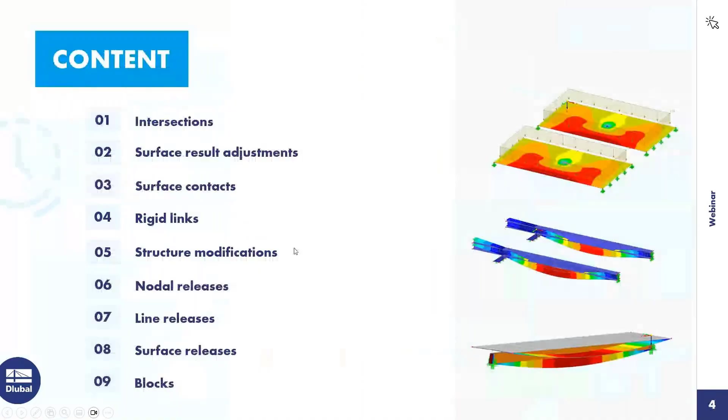Okay, to the agenda today. Those are the 9 features that I would like to introduce you. Very valuable features, but you will use some of them not so often, others more often. In my opinion, for example, you won't use the intersection so often, but the surface result adjustment is a feature that you will use more often. Those are the other features, and I prepared a model for every feature, and I will explain the function of these features in the program.

Let's start in Rfem with the first model and the first feature. You can find all features under Insert, Special Objects, where there are not only 9 features, because there are 2 new features, the design strips. That's a feature often used in the American market, and we also prepared a webinar about it. Maybe my colleague can share the link in the chat to that webinar about the design strips.

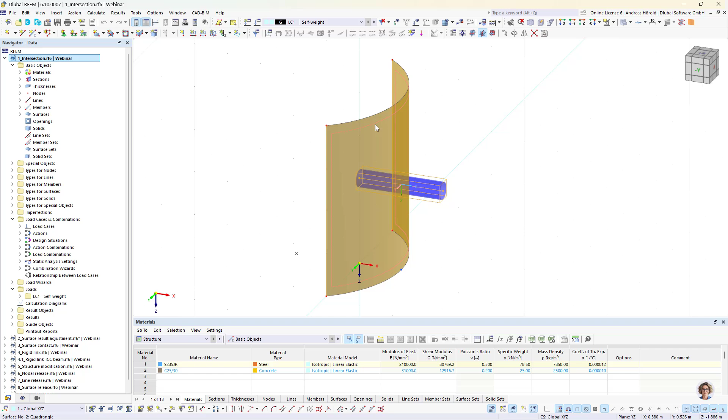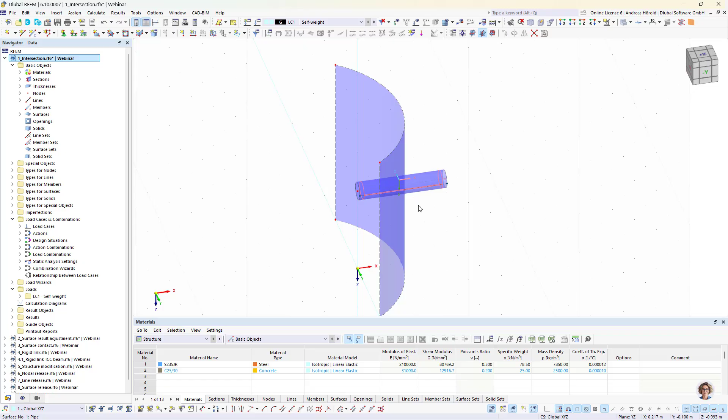Okay, let's start with the intersection. The best way is to select all the surfaces and then create the intersection. But as you can see, that's not a surface, it's a member at the moment. With a right click, I can go to member and then generate surfaces from member. And now all objects are surfaces. We would like to create an intersection, and at the end, this part of the tube should remain and not this one, and we would like to have a hole in that surface.

Okay, so let's select all, then with a right click move to surfaces, and we can create the intersection. Maybe first, the definition of the intersection: if surfaces intersect and internal forces are transferred at the contact points, it's necessary to create an intersection. This prevents the creation of independent and unconnected subsystems. So this function, create intersection, only creates the intersection line. I can show that, you can see only this line is created.

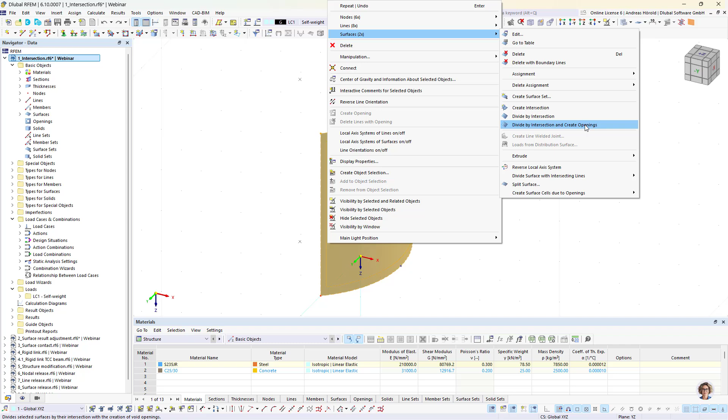I undo all, then open the dialog again. Then divide by intersection: the intersection will be created and subsurfaces will be created. And with this function, additionally, the intersection surface is deleted. So we will use that function, and you can see there's also a hole.

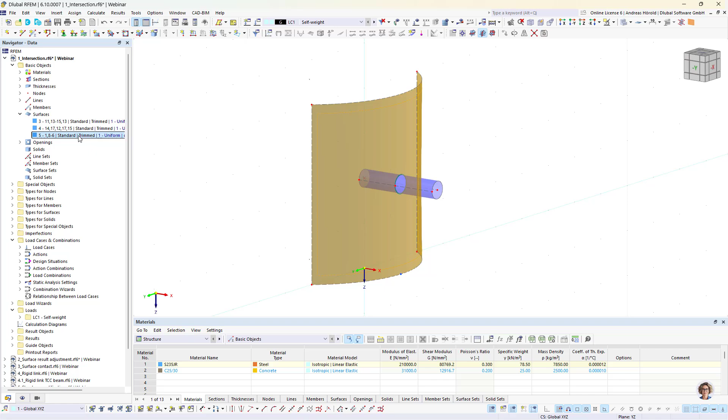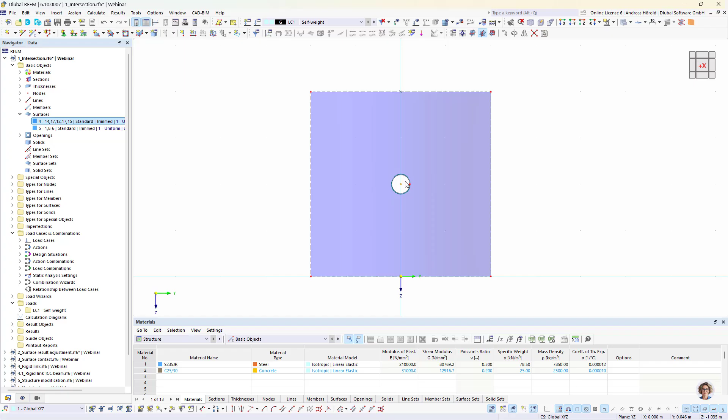So, we can easily delete this part of the tube. But if you have more complex models, I recommend going to the navigator data. Then you see all the surfaces, and you can select the single surfaces to see what you need to delete. For example, with a right click, I can delete with boundary lines. So I can also delete this line, which was the middle line of the member. And now we have a correct model.

Okay, that should be all for that feature. We turn to the next model and the next feature.

So I would like to explain the surface result adjustment. You will also find it under Insert, Special Objects. But first I would like to say some words about the surface results adjustment. It describes an area in the model whose graphical results are not represented by the actual diagrams, but as mean values. You can use a user-defined adjustment area to evaluate the smoothed surface internal forces. In Rfem 5, this was called the average region, and now the name is surface result adjustments.

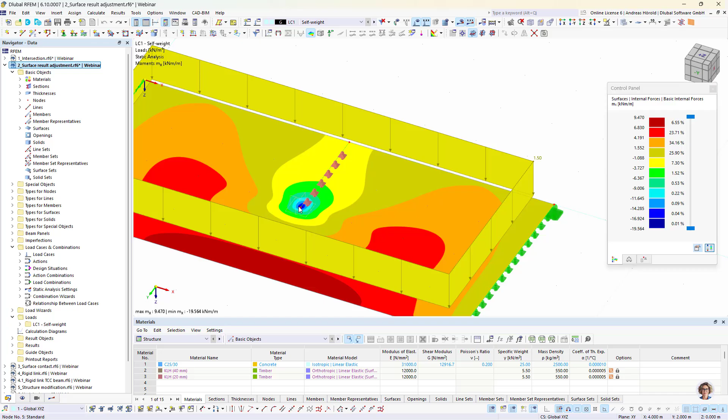We have that surface here. That's the CLT slab over a wall. And you can see there are quite high internal forces only on that point.

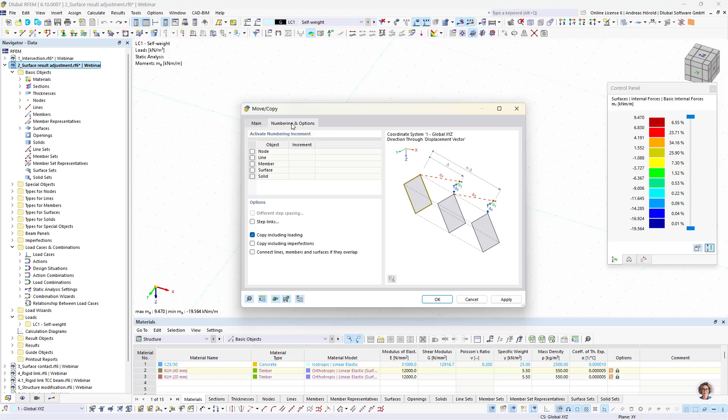And we would like to smooth that internal forces. To compare the results, I would like to copy that model. So create a copy, 6 meters, and copy including loading.

So I create the surface result adjustment only on that point, and we will compare it with the other point. Then in the menu, insert, special objects, surface result adjustments.

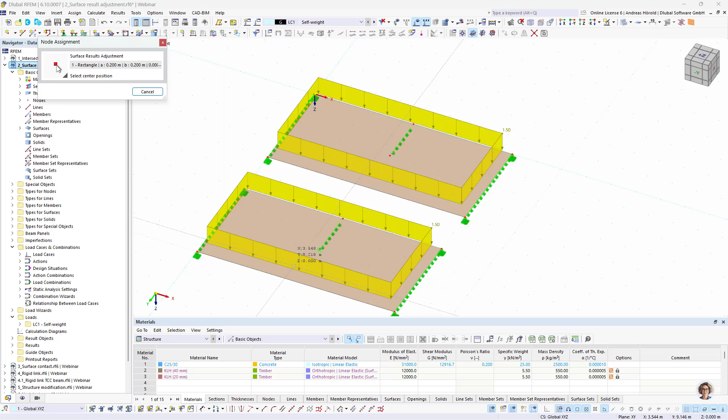Here we have different options for the shape: rectangle, circle, ellipse, and so on. The dimensions should be 20 centimeters by 20 centimeters. Then I select the endpoint of the wall and move it 10 centimeters in minus y direction. And I also have to select the surface, that surface.

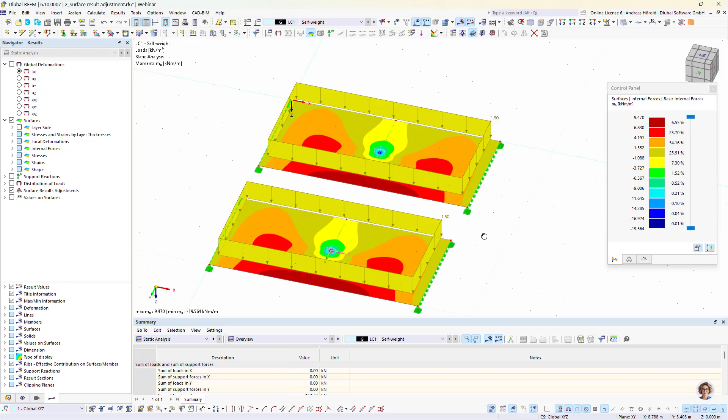So then we can calculate all. Okay, and you see that's the highest value, but that's the value what we have in the original model, 19.5. So let's check what the value is, or the highest value, for that surface.

I deselect the original model. Yeah, and you can see now is the highest minus value, the lowest value, 16.0.

Let's turn back to the surface result adjustments. I go back to special objects. You can see it here. Maybe some explanations or additional explanations of the different adjustment types.

This averaging of these values, that's the default setting for basic internal forces in surface direction y, and this is the average, well, the default setting for basic internal forces in surface direction x.

Then contact stress area. This option is currently only relevant for the steel joints add-on. Then user defined: the results of selected types of internal forces are averaged. In that case, mx, but you can select more if you want. That's not a problem.

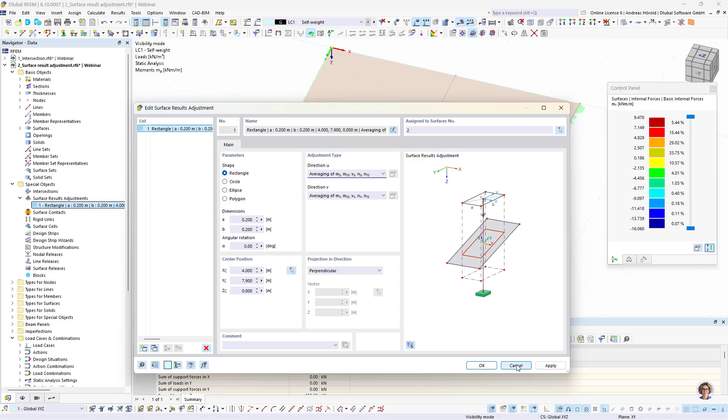When you want to average only one direction. Okay, so that was an additional explanation. Okay, that should be all for that model. Turn to the next model.

And the next feature that I want to explain is the surface contact. A surface contact describes the connection between parallel surfaces. It is a coupling of surfaces by which you can control the transfer of forces without creating a contact solid, as was the case in RFEM 5.

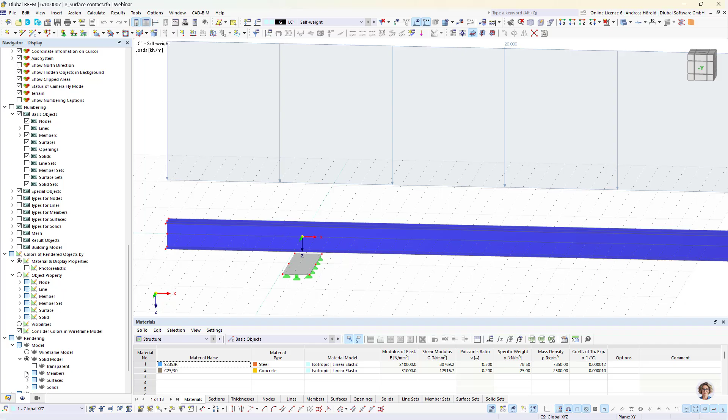And this allows you to connect surfaces whose contact is, for example, only effective for compressive forces. And that's what we would like to model here. That's a member created by surfaces, and that's a concrete surface. Let's display it in the navigator display with the real thickness.

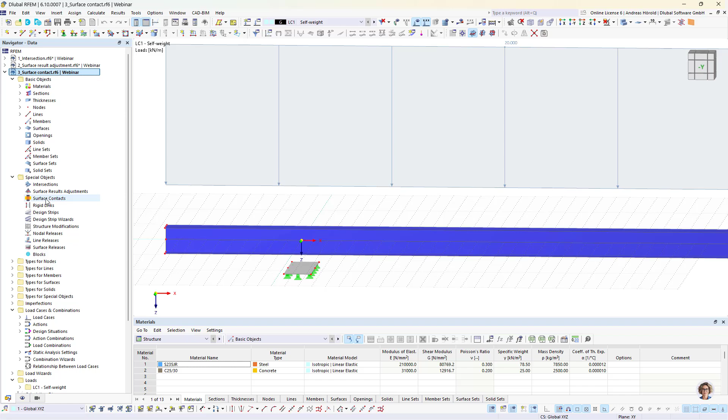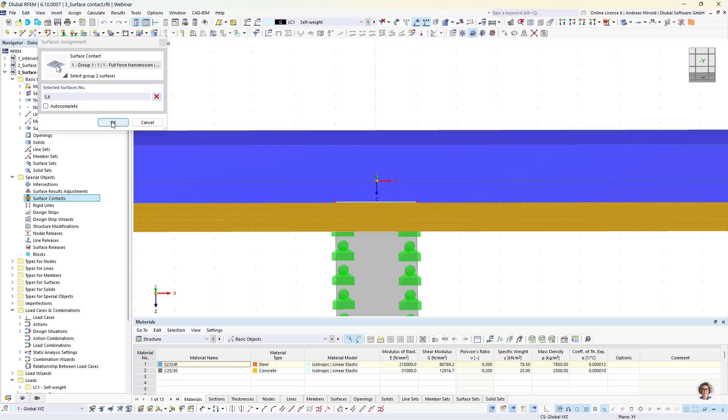So surface filled including thickness. That looks good. But in reality, in our model, it's not connected yet. So we would like to create the surface contact. This time in the navigator data, that's another option, special objects. Then right click on surface contacts, new surface contact. At first this surface, okay, and then the flanges, the two flanges of the member here.

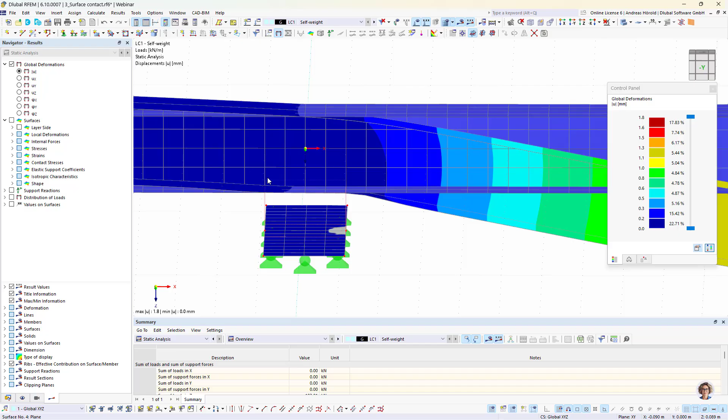So let's calculate all. The contact is there, but you can see it's rigid connected on all sides, on both sides of the concrete slab. But we would like to define it that it can lift up on this side, that the member lies loosely of the concrete block.

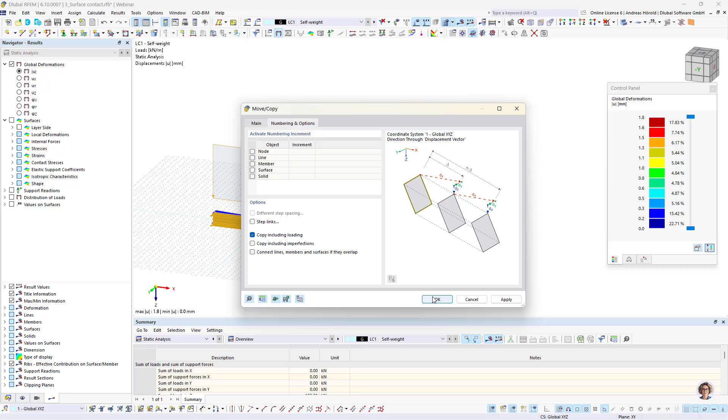To compare it better, I copy all in y direction, 2 meters, create a copy and including loading, okay. So, and I modify this surface contact.

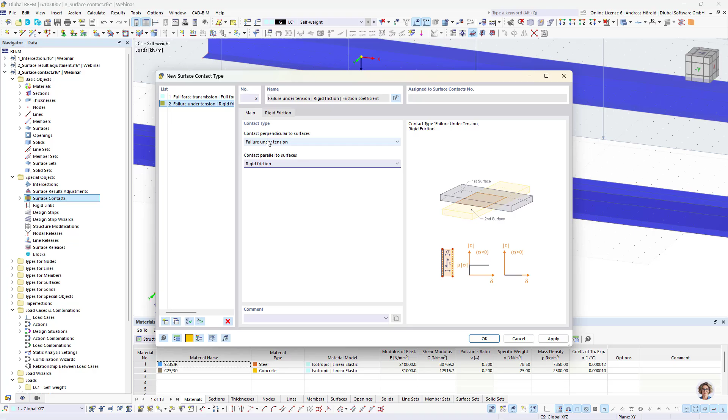Not a full force transmission, but a new surface contact type: failure under tension, that can be lifted up. And in that case, rigid friction, I define only a very small friction coefficient. But that's very important here. Okay, then we calculate all.

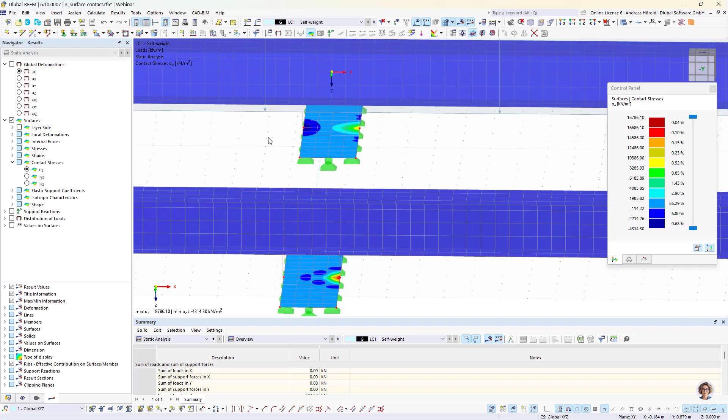Now you can see the difference. It can lift up here on this side. I can also show that on the contact stresses. In the original model there is compression here and tension on this side, but in this model there's only compression on the right side and no tension on this side.

Okay, that's all to that feature. We turn to the next model and the next feature.

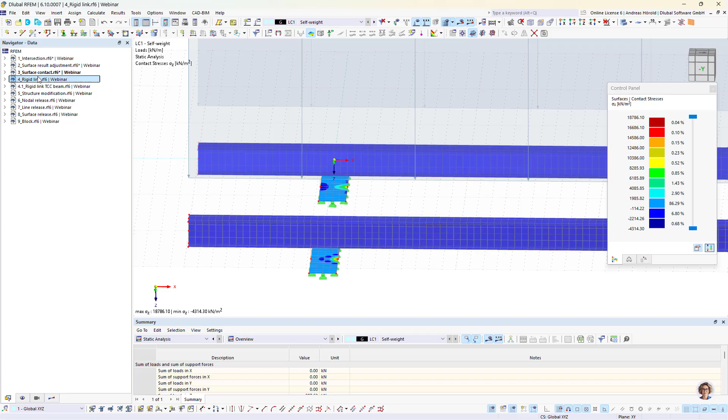Rigid links is the next feature. By using rigid links, you can model connections between lines, members, and surfaces without defining coupling members or rigid surfaces between the objects. Deformations of coupled nodes, lines, and members are identical for a rigid link.

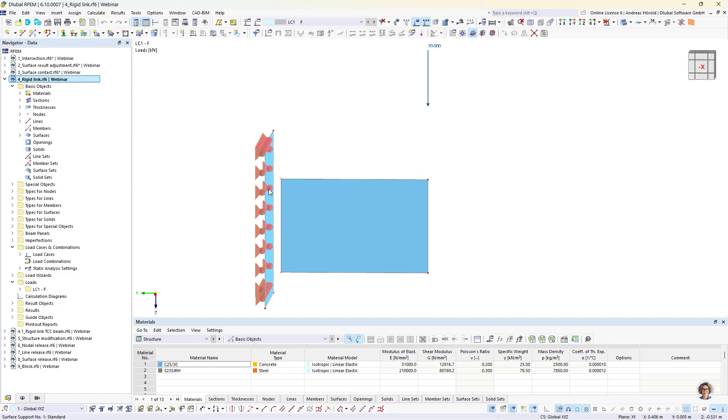In that model, I could also define a rigid surface, but with this feature, it's quite easier. The real advantage of this feature is the objects can be placed on their actual location.

When I turn to the navigator display and select filled including thickness, you can see all is on that place where it really is. So, and now I create the rigid links.

Insert, special objects, rigid links. In our case, line to surface. That's the line and that's the surface, and you can see the line and the surface is automatically created.

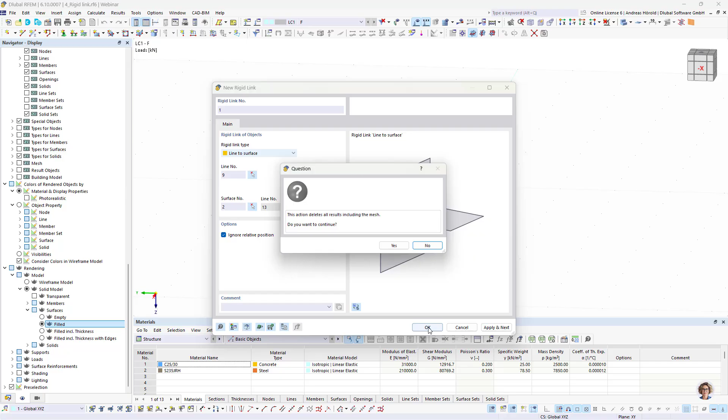So now we can calculate all. Okay, that looks quite good.

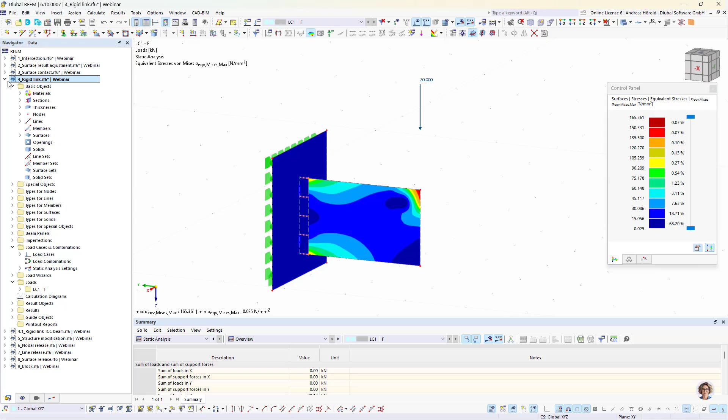I would like to show that on a more practical example. That's a timber concrete composite beam. You can see that's a concrete surface on its actual position, and that's the timber member.

And we can also go to the navigator display and select filled including thickness. But we need to create the connection.

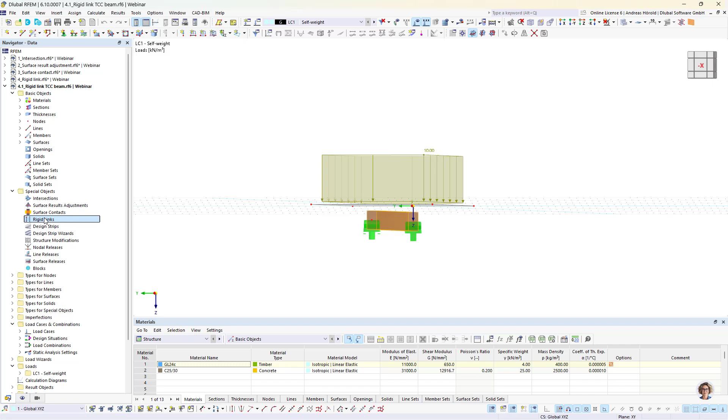So, special objects, rigid links, right-click, new rigid link, line to surface again: the middle line of the timber member and the surface. Okay, and this line is created automatically.

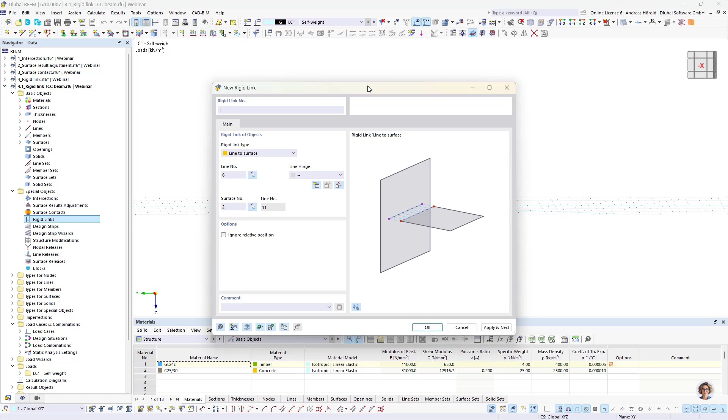And we have to deselect the option 'ignore relative position,' because we would like to consider that the member is below the surface. Okay, so let's calculate all.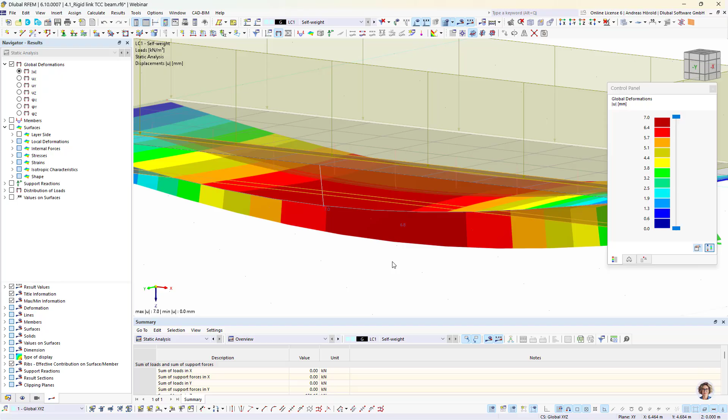At the moment, we have a rigid connection between the surface and the member. And that's not really correct, because there are joints for this connection, and we are not rigid. That's why we need to select a line hinge. So how to do that?

We take a look at the result. I think you can't really see it. Okay, 6.8 is the deformation in that point.

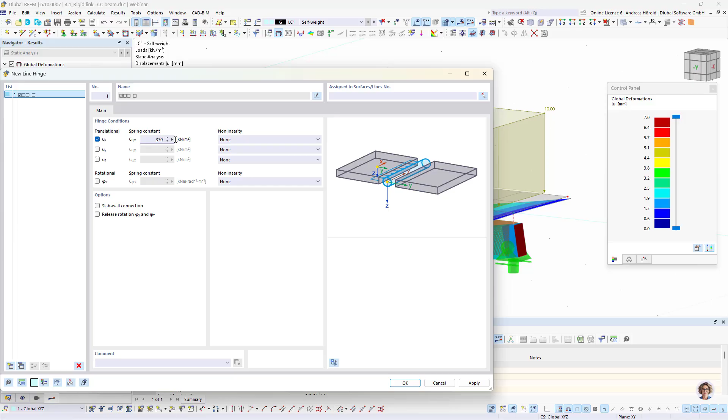Then we do a double click on the rigid link, and we create a line hinge now for the connection of the two parts of the member and the surface. And we create a spring, or define a spring constant for the longitudinal direction of the member. So, 370,000 - it can be nails or something like that.

Okay, we had 6.8 for the deformation, and now it should increase. Now, where are we? 7.8. It was increased.

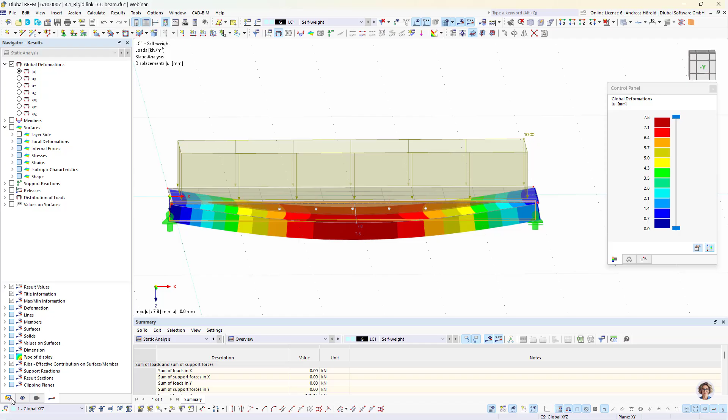Okay, then we turn to the next model and the next feature. The next feature is the structure modification.

I would like to display it on that model. I use the model that you can find in the Dlubal Center. Just a moment, I have to move it to the right screen. So, okay, you can find it under examples, projects, examples, and that's the model.

Okay, and I turn to the base data. I selected the add-on structure stability, and I did a stability analysis. But first, some words on the definition of the structure modification.

It allows you to individually adjust stiffness of materials, objects, and object types. Furthermore, selected objects or nonlinear object properties can be deactivated for the calculation. Structure modification must be assigned to load cases or load combinations. We will do that later.

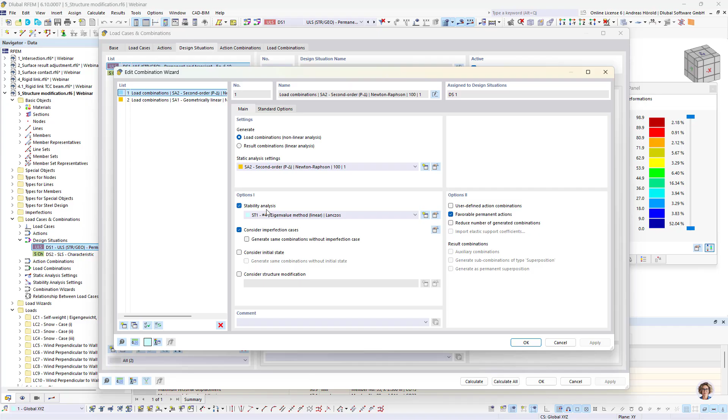I show you the design situation where I selected the structure stability. So I turn to the combination wizard, and I selected the stability analysis. So, under static analysis and design situation number 1, I can find the minimum critical load factor. That's 3.6 and combination number 13.

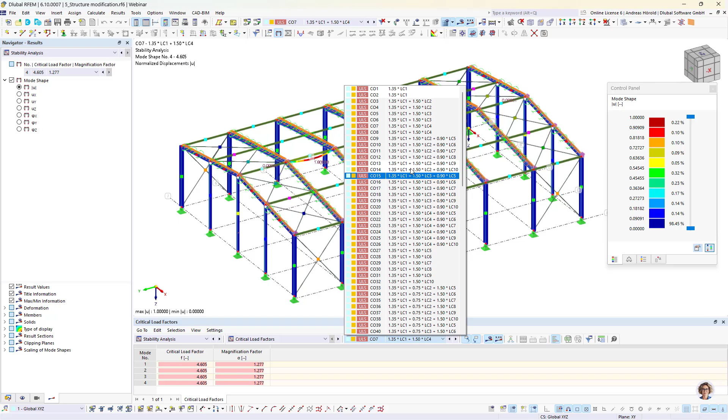So let's turn to the stability analysis and combination number 13. And you can see the critical load factors or the mode shapes are not global mode shapes, but local - for this member and this member and so on.

And I would like to see a global mode shape. I could select or calculate more critical load factors, maybe 40, and search for the first global mode shape, or I use that trick.

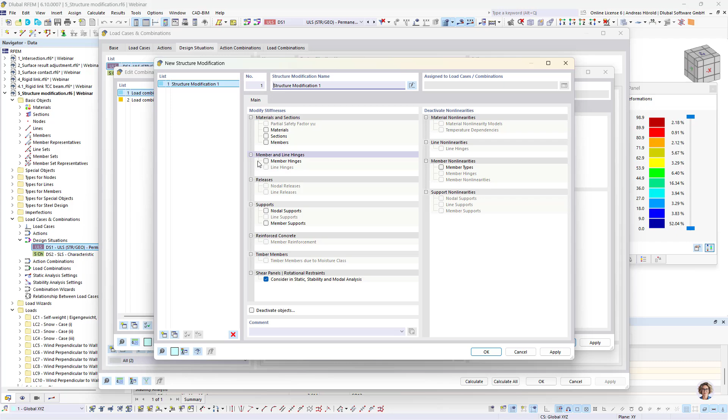So I turn back to the design situation, number 1, then to the combination wizard. And I consider structure modification, and I create a new structure modification. That's what I said at the beginning - you can modify the stiffness of material, section, members, and so on, member hinges.

Let's do that as an example for the sections. So, I increase the moment of inertia factor of the coupling members and these members in the first row. So a factor of 10 here, for IY and IZ.

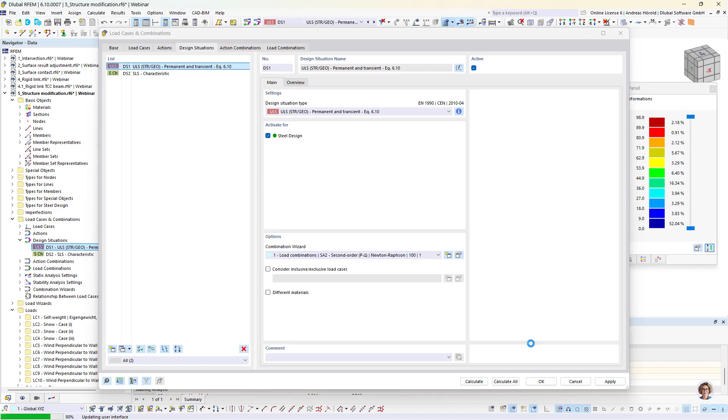Okay, those are the members. This member and these coupling members.

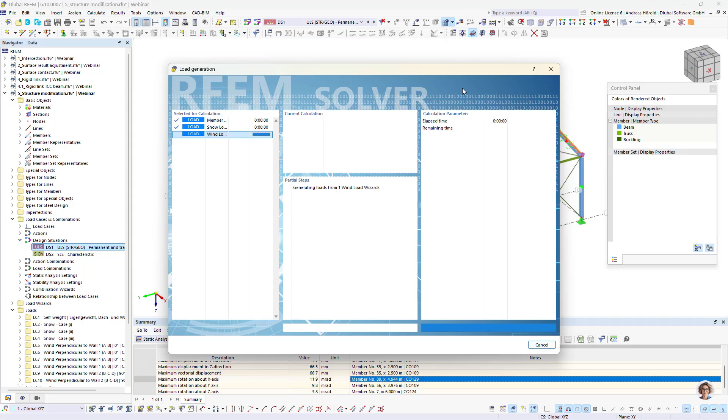So then let's calculate that, or we can do the static analysis. That's okay. That should take some time.

We have 100 combinations. First the static analysis will be done, and then the stability analysis, ST. You can see I have more than one core, so it's a parallel calculation. But we need to wait some seconds.

The result will be, because we increase the stiffness of the coupling members and so on, that we get a global mode shape for the first mode shapes.

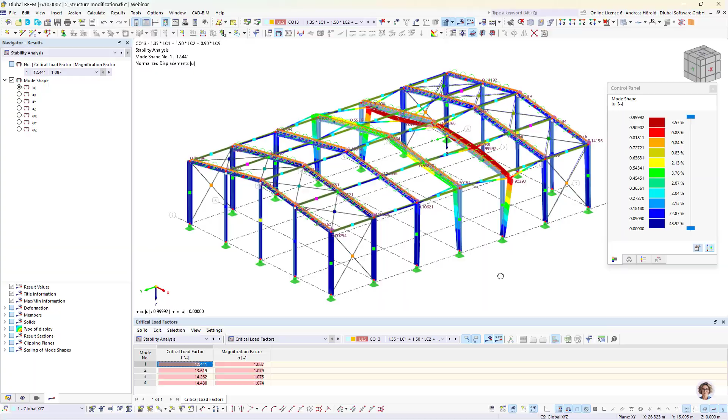So let's take a look at the stability analysis. Combination number 13. Okay, and you can see the first mode shape is a global mode shape. Also the second and the third and so on.

Just use that function only for such things, and you must not increase the stiffness of single members, only for such calculations here. It's a trick.

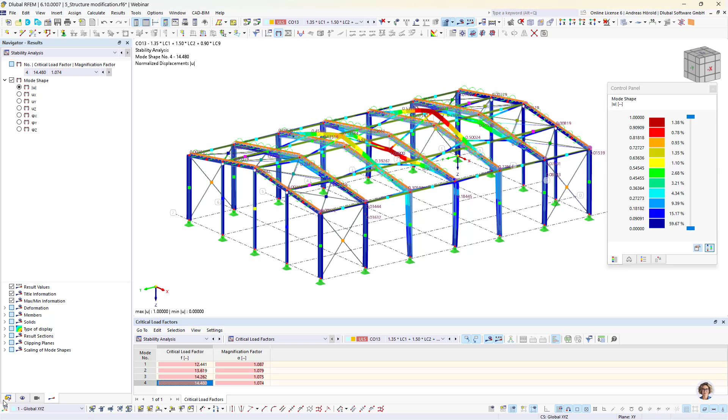Okay, then we turn to the next model. And I would like to explain the nodal release.

With a nodal release, the model can be decoupled at a specific location. You can use it to model, for example, a beam lying loosely on top of each other. I created this simple model, and I would like to model that this member lies loosely on top of this.

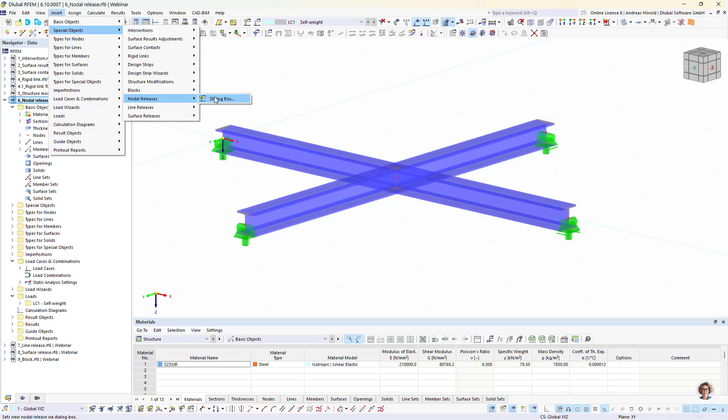So, insert, special objects, nodal releases. Then node number 5, okay. Then I will release, or would like to release, these two members.

So then nodal release type. I create a new one. So, and for the Z direction, non-linearity fixed if positive, reset.

Okay, then I have to define a local axis system of this member. Okay, that should be all.

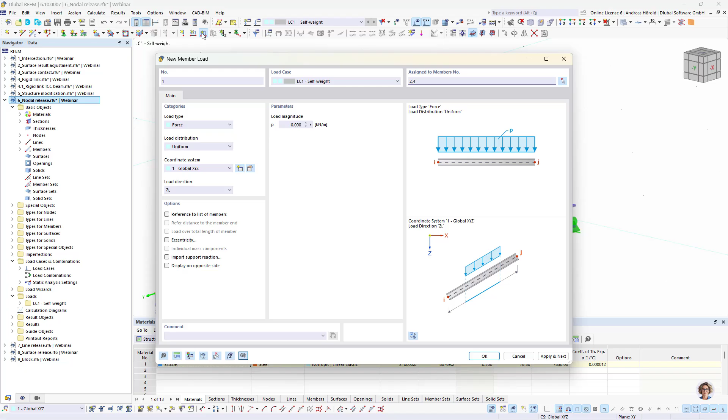So then I create a load in minus Z direction, minus 30. Okay.

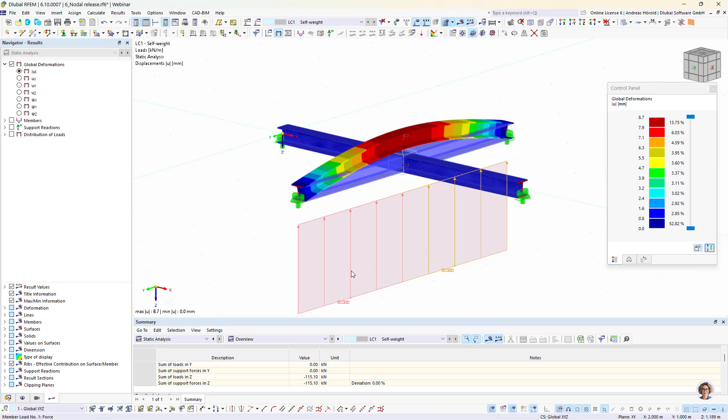So, and now it should lift it up. Okay, that works. We can change the direction. Okay, and now the deformation in the middle point should be the same. Okay, good.

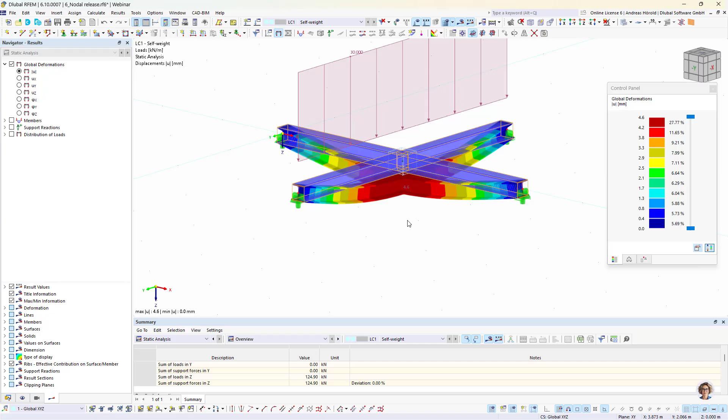That was all to that feature. We turn to the next feature and the next model.

Line release. I prepared that model, but what is a line release for? A line release allows the model to be decoupled along a line. You can use it to model, for example, two surfaces being loosely connected or transferring only compressive forces at the common boundary line.

For this model, you can see there is a moment over the support. But we would like to connect this surface with this surface hinged. So, and at the moment it's a composite beam.

It's rigidly connected, the surface and the member. You can see that on the moment at the end, and that's why we would like to define that the member is longitudinally movable.

Okay, so we start, insert, special objects, line releases. Okay. The line is this one.

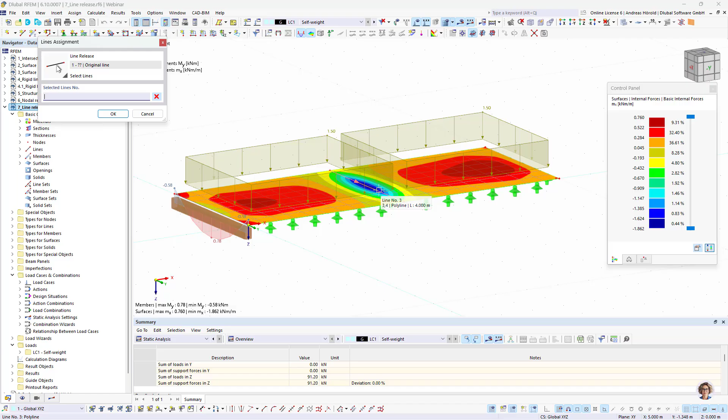Or just a moment, to compare the results better, I would like to copy the surface again, or all components. Copy 6 meters or 7 meters. Create a copy with loading. Okay.

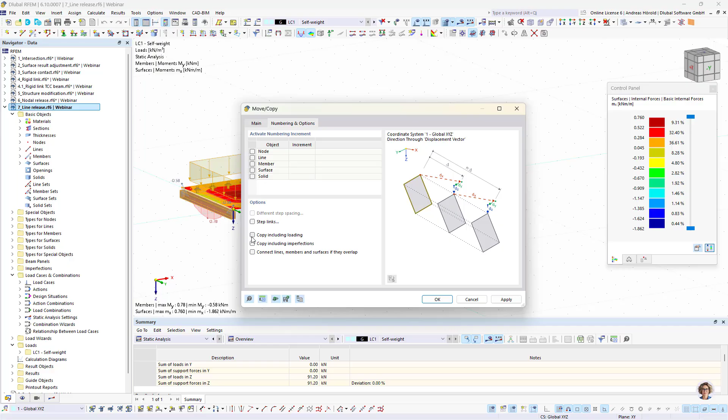And we will define the line releases only for this model. So again, insert, special objects, line releases. So line number 11. Okay. Then the surface number, this one. Okay.

Then I have to define a line release type, and I would like to create a hinged connection. Okay. So, and another line release on that line.

Insert, special objects, line releases. So line number 9. Okay. Member number 2. Okay. And I create a new line release type.

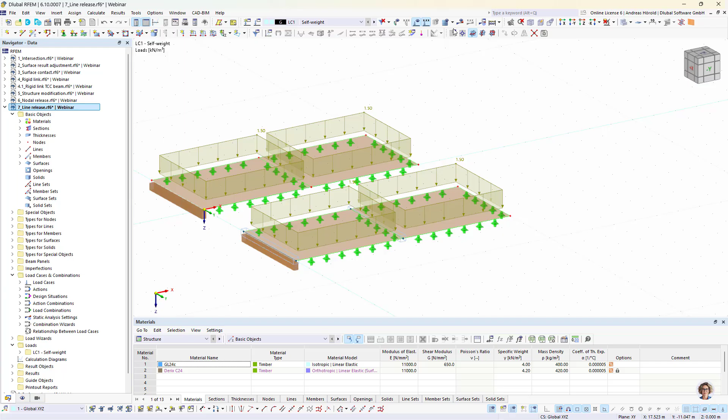And I create a very small spring so that it can also calculate the model, since it's not completely movable. A very small spring constant. So let's calculate all.

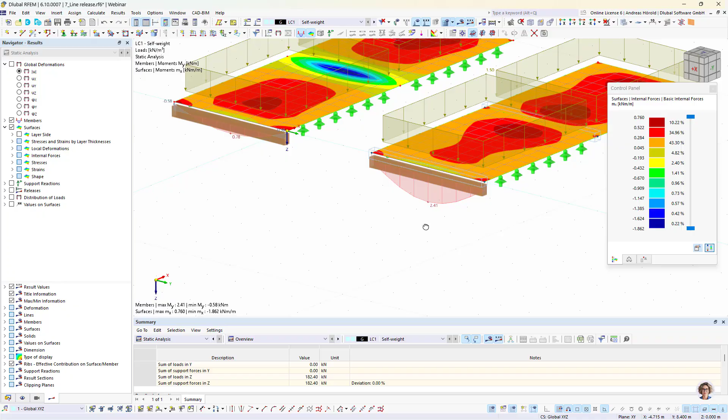Now you can see the connection is hinged between the two surfaces, and there are also no moments at the ends of the member, because it's longitudinal movable at that connection.

Okay, that was all for that feature.

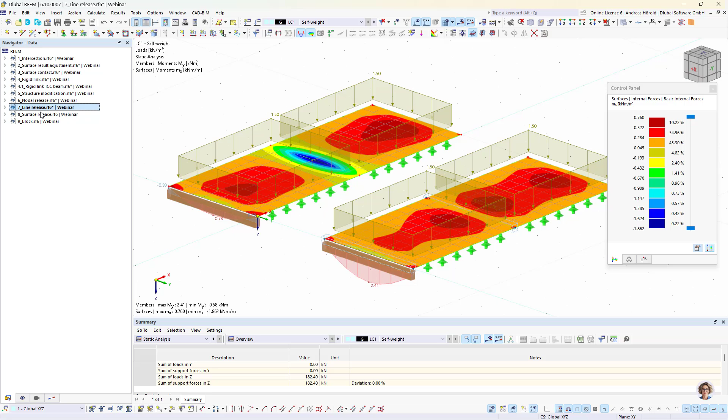Then I would like to explain the feature surface release with this model, maybe a definition of the surface release. With a surface release, the model can be decoupled on the surface. You can use it to model, for example, solids being connected in an unbraced manner or transferring only compressive forces on the contact surface. I would like to explain that on that model.

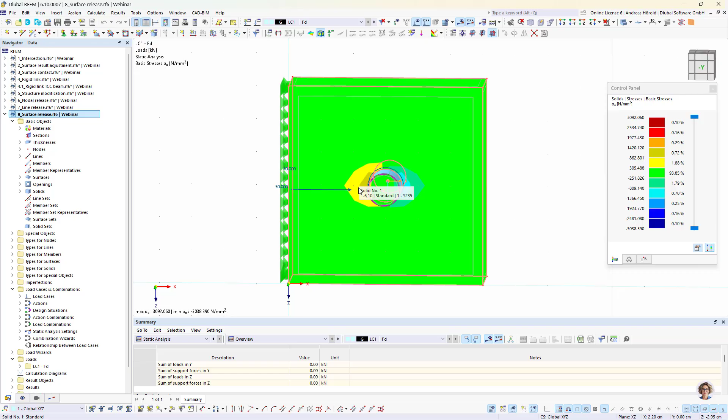That's a bolt, and you can see in that plate here are tensile stresses also on this side, and that's not correct. The bolt is at the moment glued on all sides of the hole, and the real behavior should be that it's compression on that side and no tension on this side.

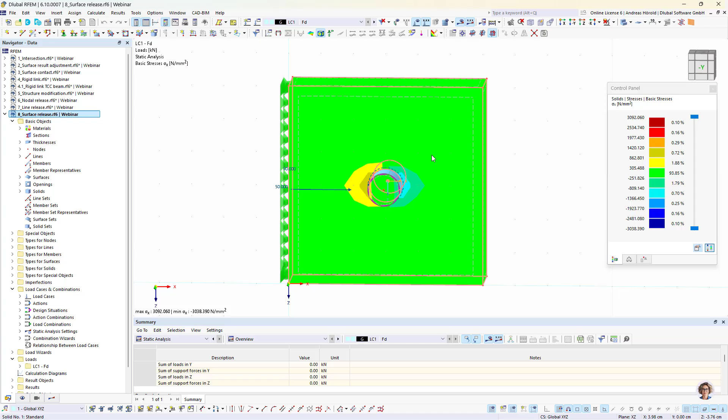Okay, and with this surface release, it's not necessary to create a contact between the two surfaces.

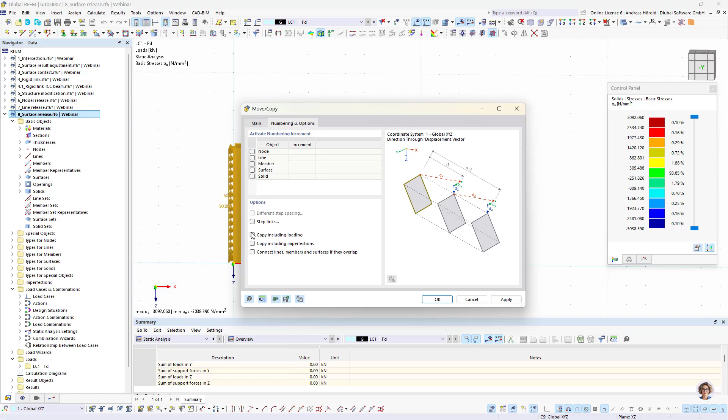So to see the difference better, I create a copy 10 centimeters in X direction, including loading, and we will compare the results better when we see the two models.

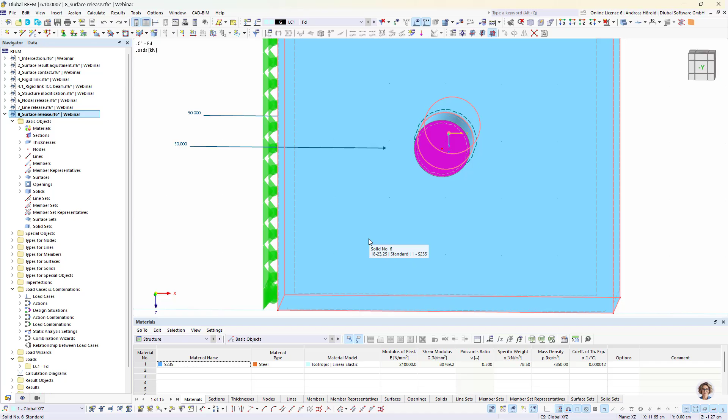So then I select only the bolt. I can do that with this function, but when you have a larger model and you would like to select only the bolt, when I press nothing, I can't select it. The trick is to press the Alt key. Then you can select only that bolt, so only this should be displayed.

Now I create the surface release. This time with the navigator, data, special objects, surface releases, right click, new surface release. So surface number, this one. Okay.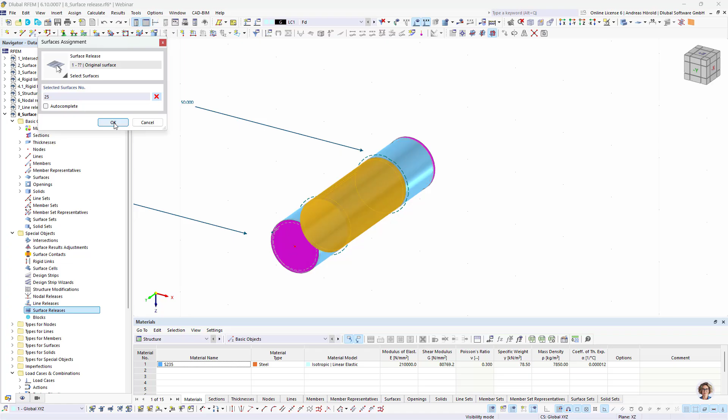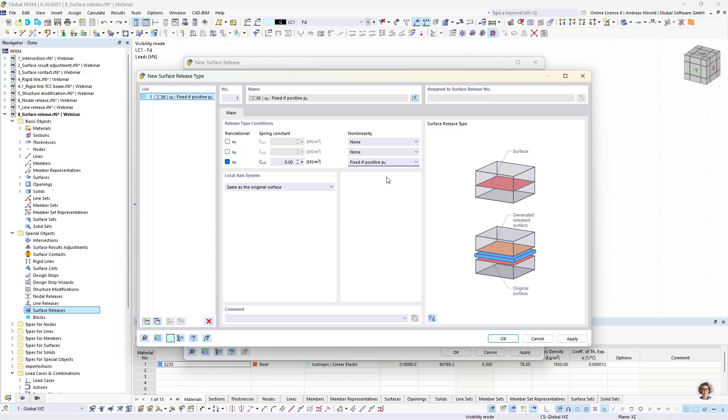So then surface release type. I select a nonlinearity here, fixed if positive, so that only compression is transferred and no tension. Okay.

So, and we would like to release the solid number. We have to display all now. Number 6. Okay, that's all.

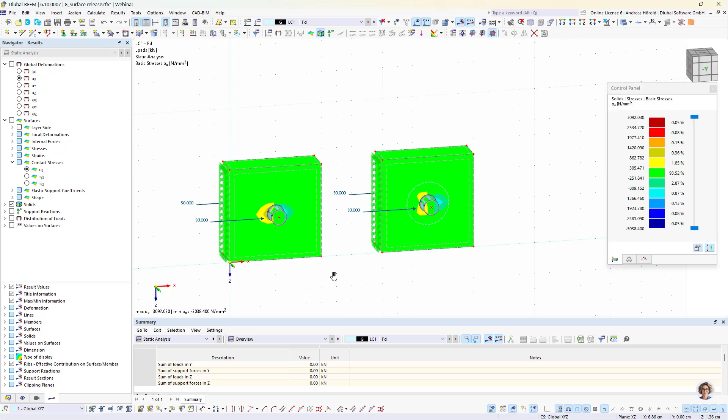So let's calculate all. Now you can see the difference better.

Let's deselect the bolts, then we will see it better. So, hide selected objects. Okay.

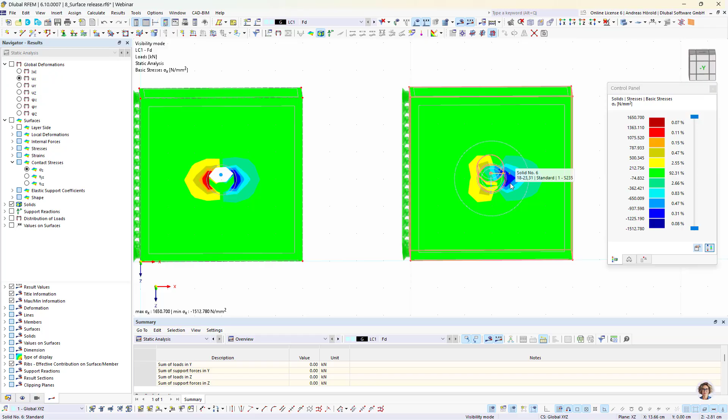Now you can see the tension here on that side, and the tension is near to zero on that side, and we have only compression on the right side. Okay, I hope it's clear now. I deselected this side of the bolt, but yeah, it's the same result.

Okay, that's all for that model, and we turn to the last feature for today, the blocks.

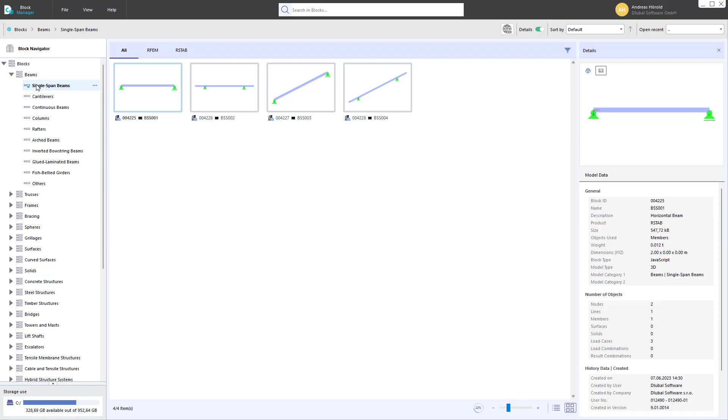You can reach the blocks with the block manager, and that's a huge database of beams, trusses, frames, bracings, and so on.

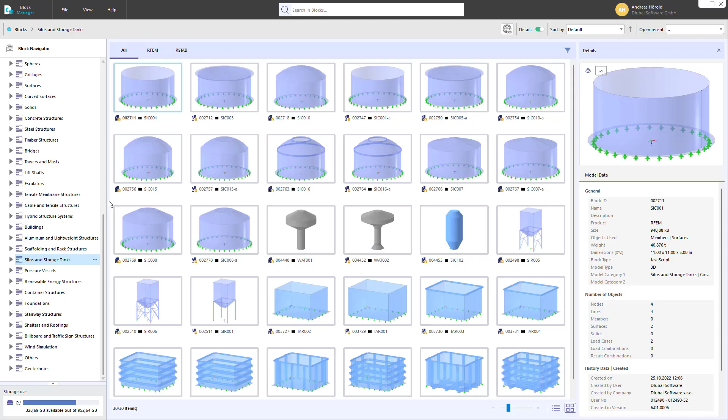As an example, I would like to show it on a storage, on a silo. Okay, I select this one. And you can define for the blocks the parameters.

I will show that as an example here, for example in that case the shell height, shell radius, and so on. Let's change some parameters: the shell height, then maybe the thickness should be a little bit higher, maybe 8 millimeters. Okay.

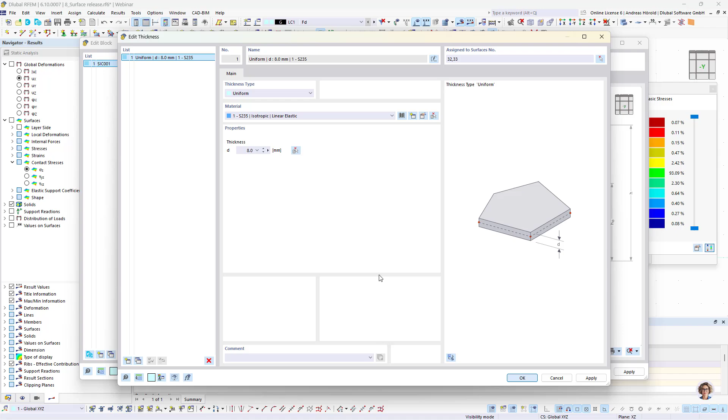Then you can also create hydrostatic pressure for that model. Let's change some parameters, 500. That's okay.

I have to modify or create a new load case: filling, and action category imposed load. Okay, so now let's create the model.

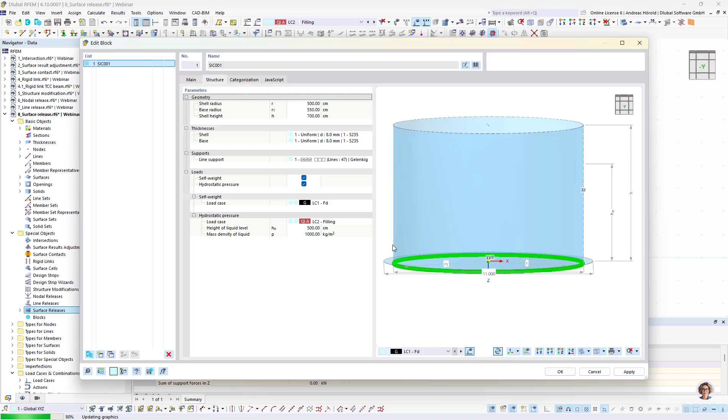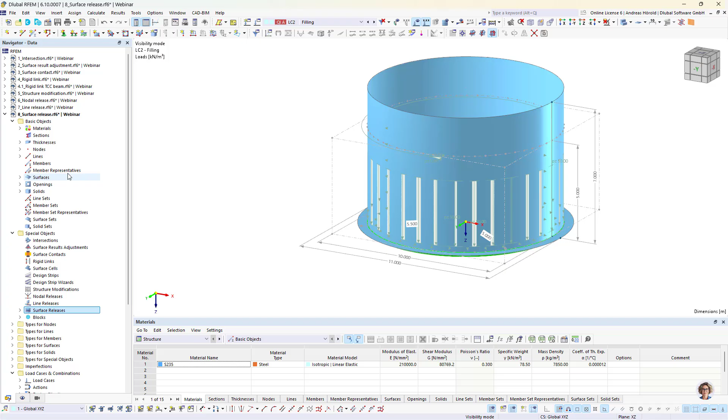I created this in the same model here, that was a mistake. Let me turn to the prepared empty model. I'll do it again, just a moment.

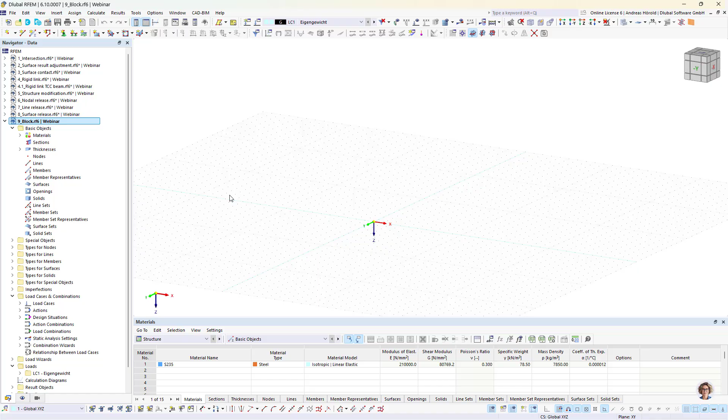So the silo, change the parameters again, eight millimeters, so. So filling, okay, and yeah, I changed the German spelling to English. Self-weight, okay.

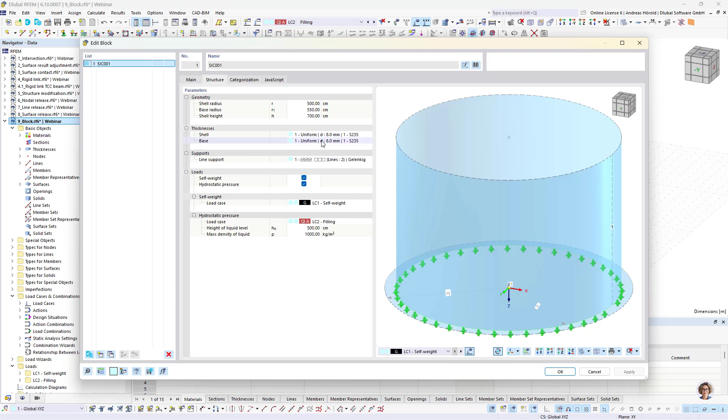So you can see also that load case is created in the model, and you can change the parameters of the block anytime. Sorry, that line I have to click. I can edit the block also later. Okay.

So that should be all for this feature. Yeah, that's also the end of the webinar.